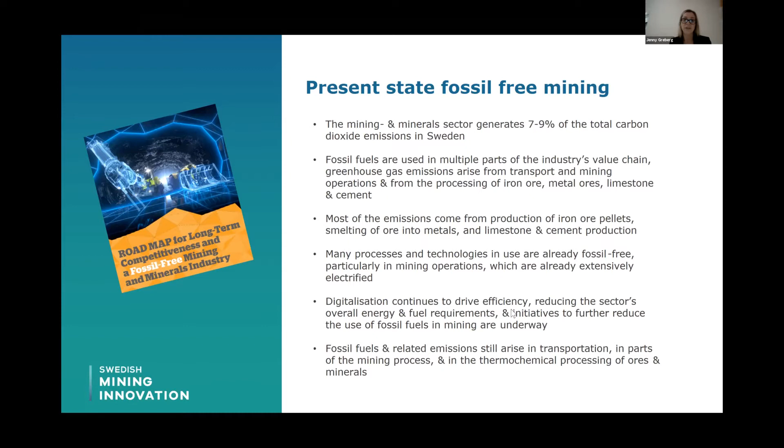As Minister Baylan mentioned, we have a goal in Sweden to have fossil-free mining operations by 2035. According to this roadmap, we think we can reach that goal, and we know the technology will be available. I would say the biggest worry is the implementation of this, whether we manage to do it by 2035. But further automation and digitalization will also reduce the energy needs and therefore lead to more efficient and optimized operations.

Infrastructure for charging, and possibly alongside hydrogen tanking, will also complement a strengthened electricity distribution network. Some of the initiatives going on right now include the big project that LKAB and partners are running, called Sustainable Underground Mining, SUM, where they aim for a fully electrified and automated mining operation.

Also, as you will hear from Mr. Ranggård later, Boliden is working intensively with electric trolleys and other things. Epiroc, the Swedish equipment supplier, is focusing more and more on battery-driven mining equipment, and they already have several battery-driven equipment options available in their product range.

When it comes to processing, that we believe is going to take a little bit longer. We have the goal to reach that by 2045. And we think that by then, iron ore processing can be CO2-free through hydrogen-based reduction.

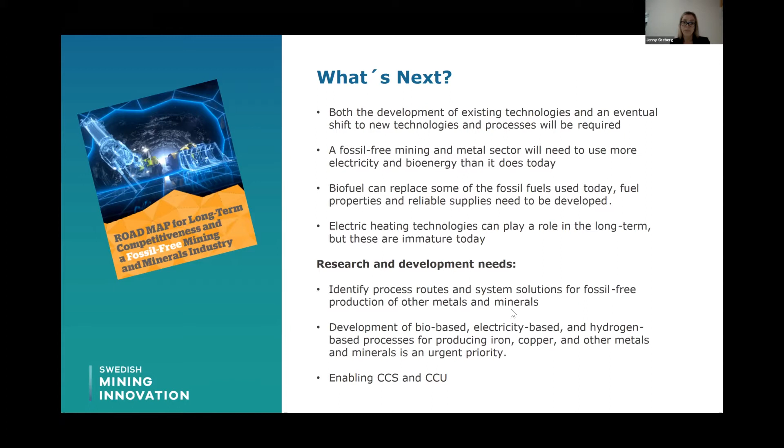Also, a lot of work needs to be done to enable carbon capture storage and carbon capture utilization. So the main challenges we see, I would say not in any particular order - the permitting process is a challenge when developing these new processes.

We also need a holistic approach to political decision-making that avoids suboptimal instruments that weaken competitiveness and make these fossil-free operations more difficult. Again, research and development for fossil-free production processes and carbon capture storage. Also to secure access to fossil-free electricity at a low total system cost and high reliability.

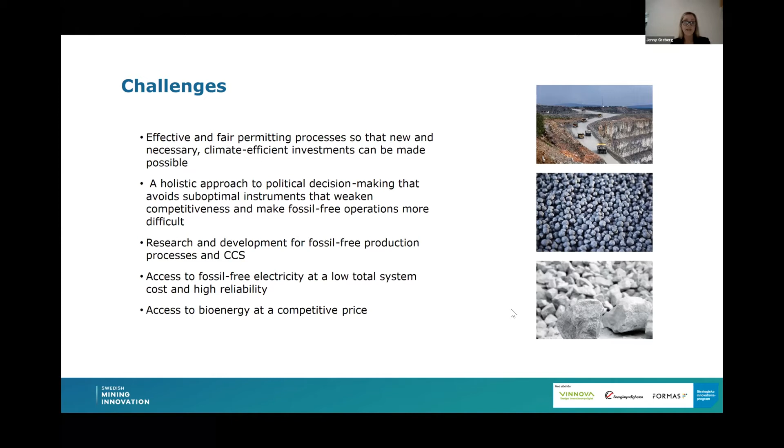That's a key for this. And access to bioenergy at a competitive price.

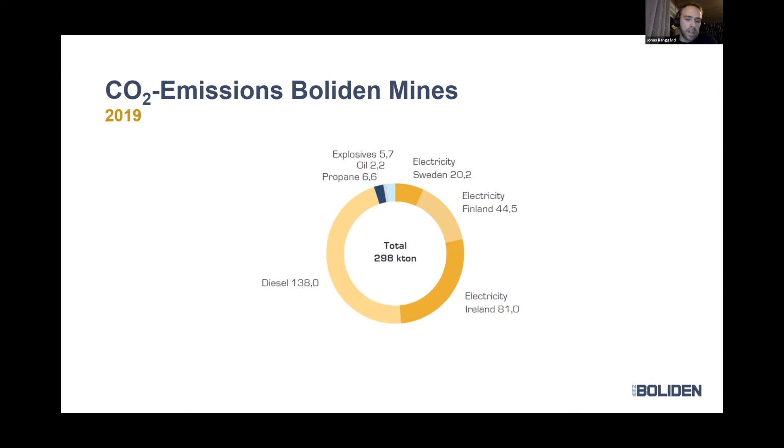From the energy program's perspective, where we should put our R&D resources is into electrification of mining equipment, because we need to lower our diesel consumption.

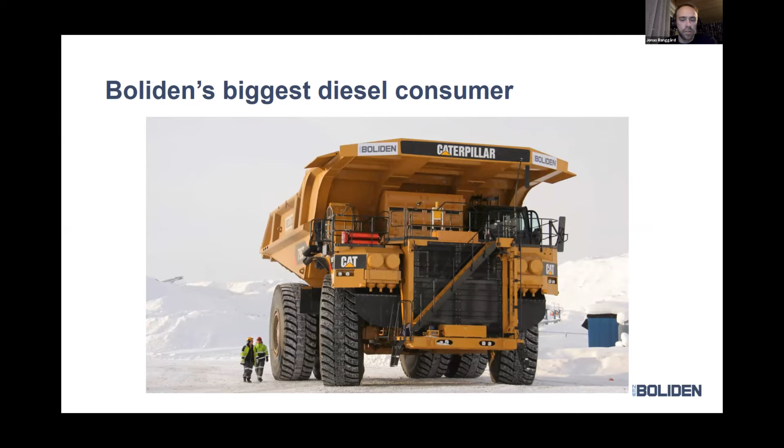Sure, we have a lot of mining equipment everywhere and heavy transportation on public roads, but roughly 70% of all the business area mines' diesel is consumed by one vehicle type: the large mining trucks in Aitik and Kevitsa. So these can't be neglected, and hence we've been focusing a lot on these vehicles in the past years.

As you might have heard, in 2018 we built this trolley pilot line, as we call it. It's a 700-meter long test line on a waste rock ramp in Aitik. We converted 4 trucks and equipped them with pantographs.

It works pretty much the same way a train operates - they connect to an overhead copper line using pantographs, and since these trucks are diesel electric to start with, it's quite an easy conversion to do. When you power them using overhead lines, you can actually make them travel twice the speed, while diesel consumption goes down to close to 0.

A little over a year ago, the board made a decision that we should pretty much go all in using this technology, investing roughly $30 million in building more trolley lines in Aitik and Kevitsa, and converting even more trucks. So we'll have in total 14 trolley-capable trucks in Aitik and 13 in Kevitsa, and a couple of kilometers of trolley line on each site within a couple of years.

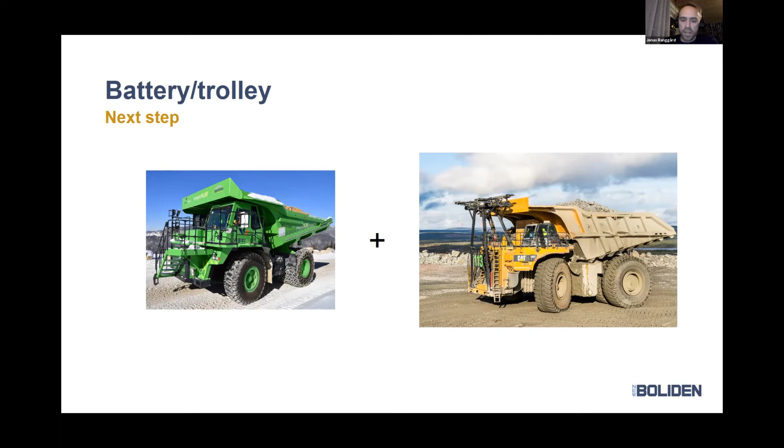But we see that if you combine trolley and battery, you can achieve a diesel-free hauling cycle. So that's what we have been focusing on a lot in the past years, and we hope that we can set up some kind of conversion within a few years.

And I can just mention this also. Why not fuel cells? Because that is a question that I get a lot, especially in the past couple of months, where Anglo American did this press release that they will convert the Komatsu 930 truck to fuel cell power.

I really think that both technologies can exist at the same time, but hydrogen powered trucks does not make sense for us, because we have so cheap electricity and strong power grids that we don't need to have any on-site storage of energy. Therefore it's more profitable and sustainable for us to choose direct charging, compared to hydrogen, where you have quite a lot of energy losses in producing hydrogen from electrolysis, and you have energy losses in the fuel cells.

But if you have a mine that has a weak electrical grid, for example, you might only have diesel generators and you want to invest in wind and solar to power the mine, then I can see that fuel cell or hydrogen powered trucks might make more sense. But we are focusing on trolley and batteries.

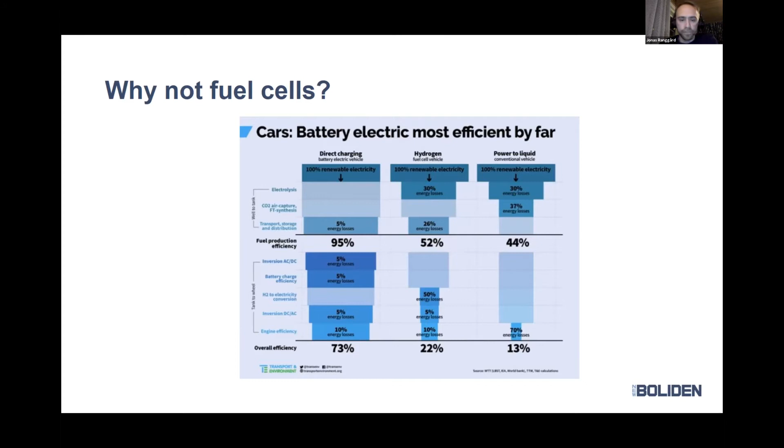So to summarize, there's value in being sustainable. Open pit mines are the most diesel intensive, so we focus on them. Trolley is a good solution to lower the emissions, and trolley will enable battery trucks and achieve diesel-free mines. So that's what I had.

Thank you. Thank you very much, Jonas. I think one big difference between Brazil and Sweden might be all this snow. But we would then like to hear more from the Brazilian side, your opinions and research and things going on there. So first of all, I would like to welcome Claudio.

All right. Well, I can see the use of this meeting because we need really to align things. I work at CETEM, which stands for Center for Mineral Technologies. And we are one of the research institutes of the Ministry of Science, Technology, and Innovation, where Soriano is at, right? CETEM is dedicated to mineral technologies, and it's the only institute in Brazil that is dedicated to a single theme, right?

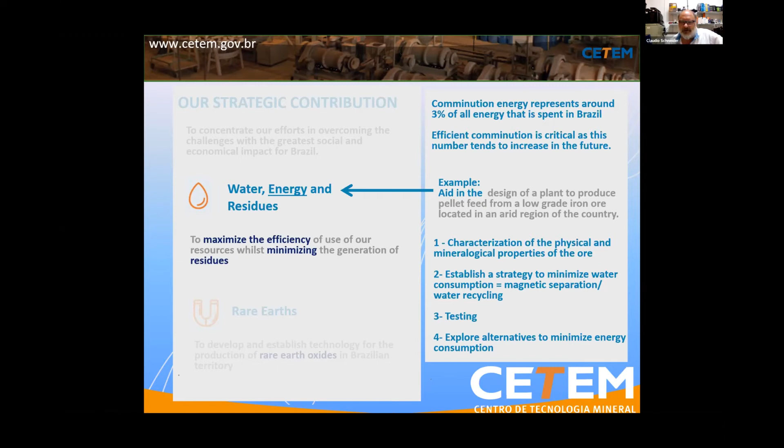We also did some testing in our power plants, and explored alternatives to minimize energy consumption in comminution. So how do you do this?

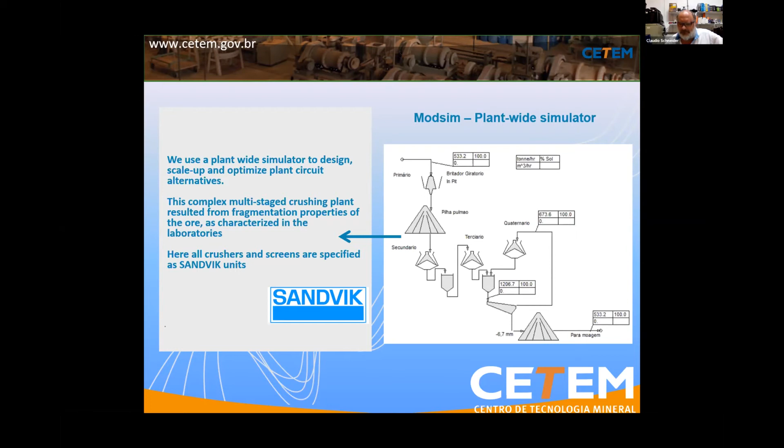But this is a very tough ore to break. We needed 4 stages of crushers in order to get to the size ready to grind and then concentrate the iron ores. So there are many alternatives to this type of approach.

Also, one of the alternatives, instead of crushing and conventional grinding with ball mills, you can use autogenous grinding, for example. Autogenous grinding is advantageous because one autogenous mill can replace all of these crushers except the first one, and replace part of the ball milling carried out later on to get this iron ore to a pelletizing size, which is 75 microns.

The other alternative is high pressure grinding rolls, which is a very efficient way to grind particles, and the conventional approach, which is showing the design for it. These arrows here show the results for these 3 different approaches.

In the end, for this ore and these characteristics, we found that the conventional way of grinding would require 20.75 kilowatt hours per ton of ground ore. So these numbers are very important for me to decide which way, I see that, Karin, to decide which way this thing is going to be crushed and ground.

And this same software developed here is also used in Luleå, for example, by Bertil Pålsson. There are other alternatives too.

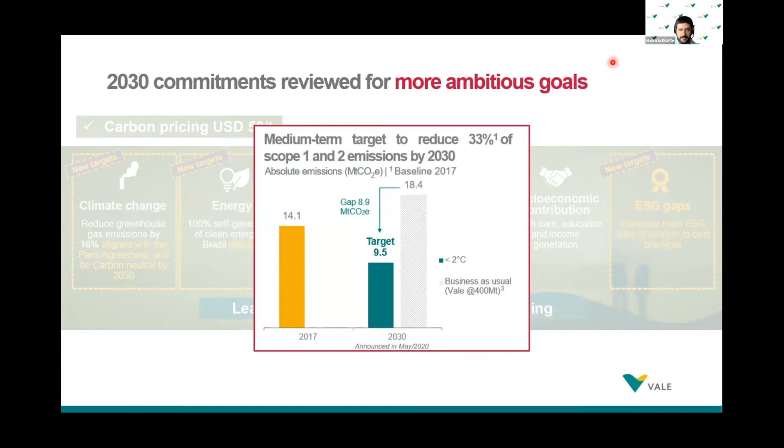So to meet those challenges, Vale created the PowerShift program in 2018. The PowerShift program is focusing on cleaning our energy matrix. As Jonas said, scopes 2 is probably easier, so we're focusing mostly on scopes 1 now.

And as he said, large mining trucks and surface mining operations are our biggest priority right now in that space. But we also have initiatives in underground mining - we have the Kiruna trucks, and we've been trialing some Epiroc and Sandvik equipment.

But we're also focusing quite a lot on railways, because actually, unlike Boliden, the single largest consumer of diesel in Vale is our locomotives, because we have to transport over 300 million tons of iron ore between our mines and our ports in Brazil. And unfortunately, our mines are quite distant from the port.

And we also have a lot of emissions - most of our emissions share is from metallurgical processes, like what Claudio was talking about earlier. But we feel like we have a stronger opportunity at this moment with the mobile equipment, mostly because diesel is a more expensive fuel than natural gas, for example. But I'll talk more about that in a few minutes.

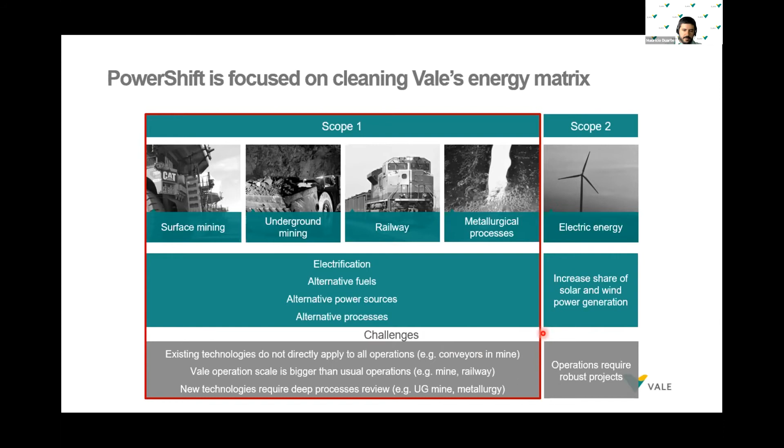And we have already several ongoing projects. So we have our first battery electric shunter, the 2 MWh electric equipment—no diesel. We also, as I mentioned, are trialing underground electric equipment as well, and we've been trialing biofuels, especially in the production of iron ore pellets in Brazil. But those are the ones that we can disclose right now.

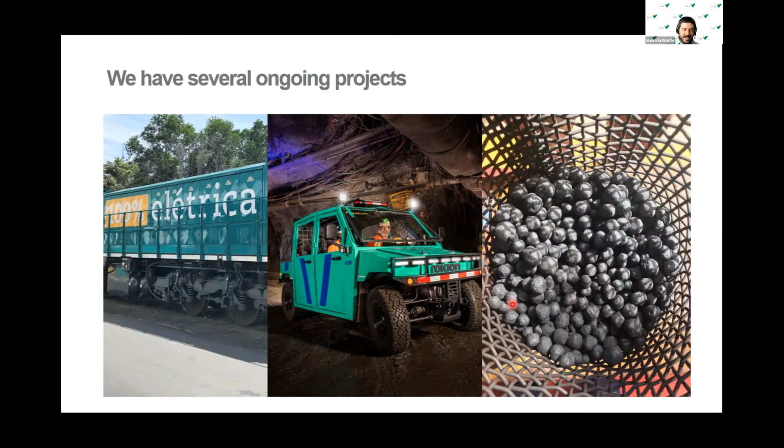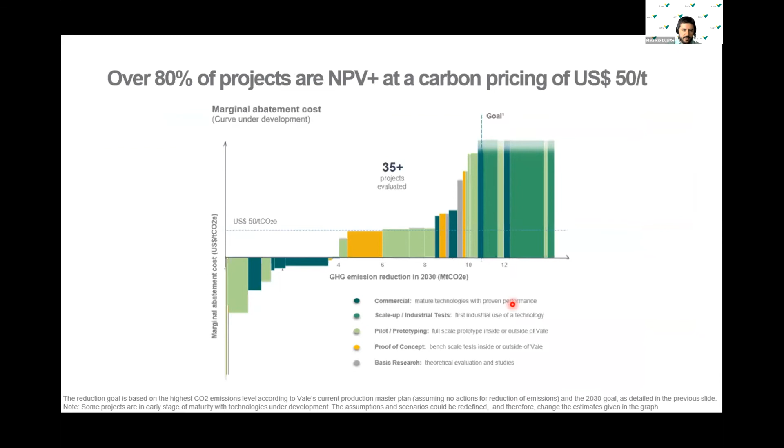So we want to talk some about our portfolio of options. Currently we're assessing several dozens of projects so we can meet our targets. This is the decision-making tool that we use. So if you can indulge me for a few minutes, this is our marginal abatement cost curve, in which we have all of our current projects that we are assessing. If we have more than one solution for a specific challenge, we just included the most competitive one.

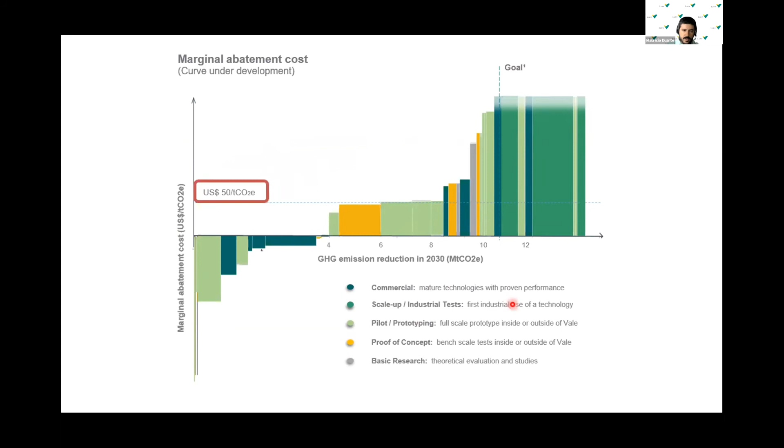On the vertical axis, you can see the marginal abatement cost for the technology—what's the cost, the increase or reduction of costs, to save one metric ton of CO2 equivalent. On the horizontal axis, we have our cumulative greenhouse gas emissions that we need to reach by 2030. And we also have our goal: a reduction of 8.9 million tons of CO2 per year, and our shadow pricing for carbon, which is $50 per ton.

So the projects highlighted here are the ones where we can both reduce cost and reduce emissions at the same time. These are our priorities right now, but this includes our Scope 2 emissions from our electricity. Then we have projects which are not economically feasible as of now, but could be with the carbon pricing we've set for ourselves. It's also important to note this is not based on jurisdiction—this is for Vale. But as you can see, we have several projects above that line.

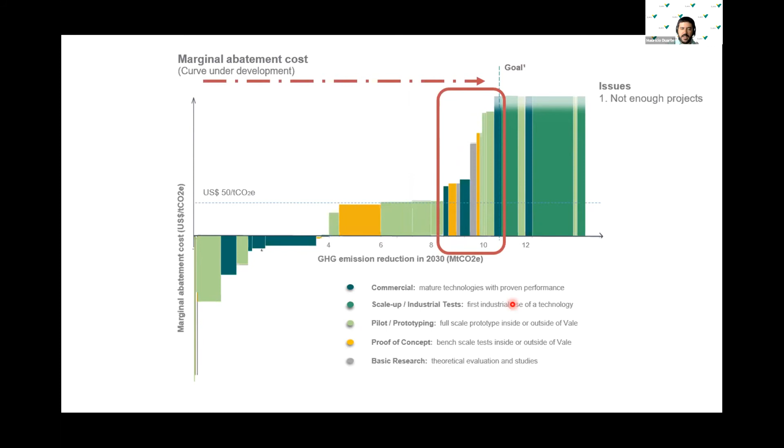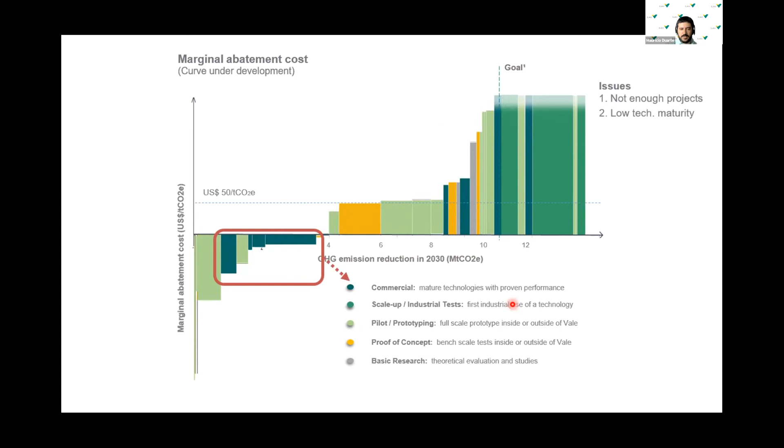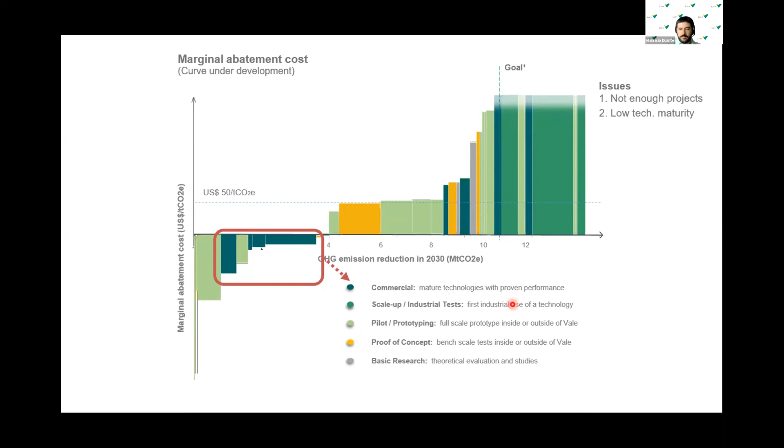So first of all, I think it's clear that we do not have enough projects in our portfolio to meet our targets. The other issue is that very few of these projects are mature technologies. This brings us to a situation where we need more projects, and we need to increase the maturity development of the solutions.

We feel like the only way to get there is through collaboration, and we feel very strongly about that. We've been talking with several, not only OEMs and new OEMs, but also our peers, because we feel that collaboration on technology—specifically about decarbonization—should not be part of the competitive agenda. On the other hand, we need to increase the rate of development of these solutions.

We already have lots of projects going on. We've learned a lot in the last 3 years. We believe the only way we can get to where we need to be—where the sector needs to be—is through industry-wide collaboration. And we believe that joint pilots with the right people and the right mindset are the best way to get there. So please consider Vale as a partner for collaboration in decarbonizing the mining sector.